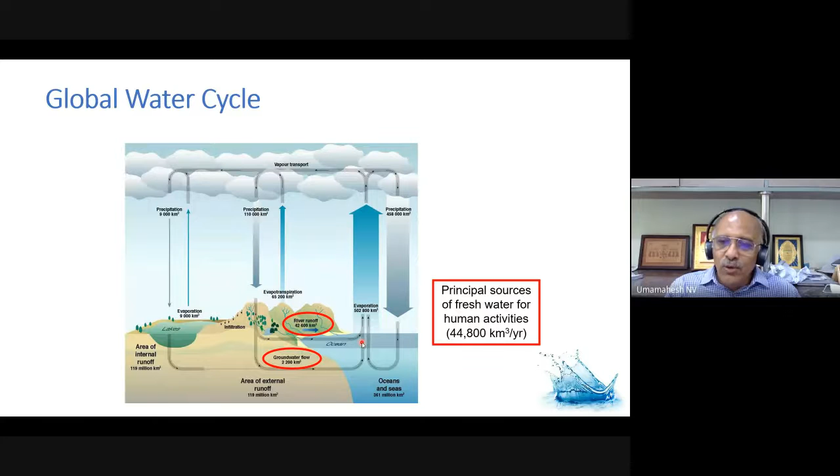And in this, what we are interested in is the river runoff, which is around 42,600 kilometer cube, and the groundwater flow, which is 2,200 kilometer cube. So these are the two freshwater sources that we can actually use for our human activity. We can consider these the principal sources, which amount to around 44,800 kilometer cube per year, a considerably very large amount. The only problem is that, as we'll see later, this water is not available uniformly in both space and time.

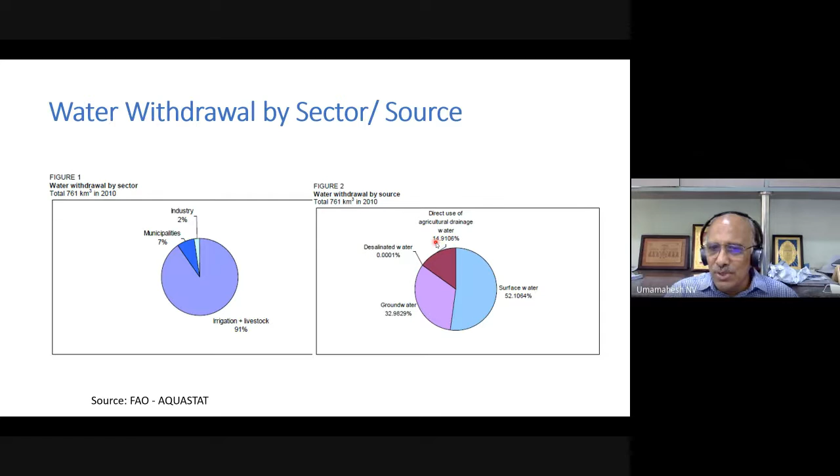Okay, so with this background, I just wanted to give a picture of the water resources available across the world, with specific reference to India. So we know that we are already reaching a situation where there's going to be more and more water stress. And certain places may reach a point like, as many of you would have heard, the situation that happened a few years back in Cape Town, South Africa, where there was an acute shortage of water. In fact, our Indian cricket team was there, staying in a 5-star hotel, and they also had to get water only in buckets. And if we continue developing water resources the way we do today, at least some of our cities may reach that kind of situation.

So with this, let's look at what is meant by sustainable development and what are the goals of sustainable development. This entire FDP, as I understand, is on sustainable development, and a lot of people would have talked about it. But here we are talking about water, and my focus will be on urban water as I proceed further. When you talk about sustainable development, water plays a very important role. It is the foundation of sustainable development because it is the most important component, whether we talk about energy, food, health, peace and security, or poverty eradication. So water is a very essential element that needs to be considered.

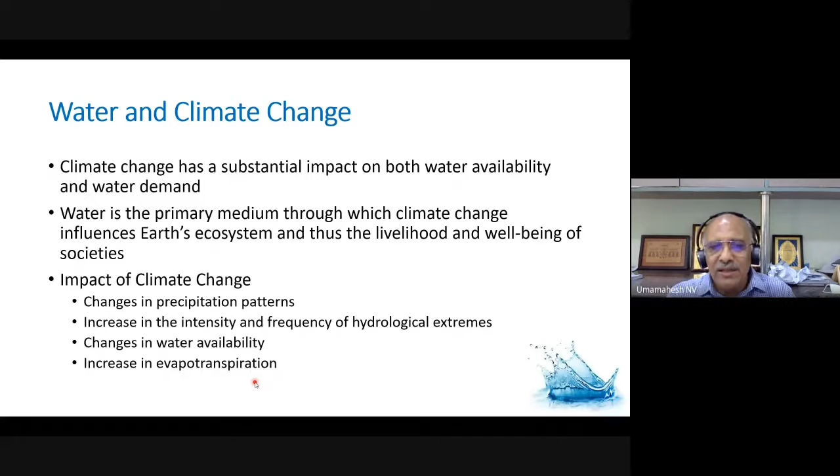So these four could be said as the major impacts of climate change on hydrology and water resources. We are already stressed because of the limitation of freshwater resources, and added to this, we have another challenge to face - the impact of climate change.

With this background, I've generally discussed water availability and the goals of sustainable development, and the impact of climate change. So let us move into the main theme of today's talk, that is urban water management.

Urbanization has become an important aspect. Across the world, there's a trend observed - the urban population is increasing. There's a lot of migration taking place from rural areas into urban areas, and the population living in urban areas has started increasing across the world, and more so in our country.

So what is the impact of this urbanization? Urbanization leads to a very accelerated rate of social change because an urban area starts developing so fast that there's a sudden social change in the way people live. Services that you provide become more and more complex - there's increased complexity in providing basic services to society in terms of water, transportation, or health facilities. Providing any basic needs in a city becomes very difficult, and there's increased cost of public services.

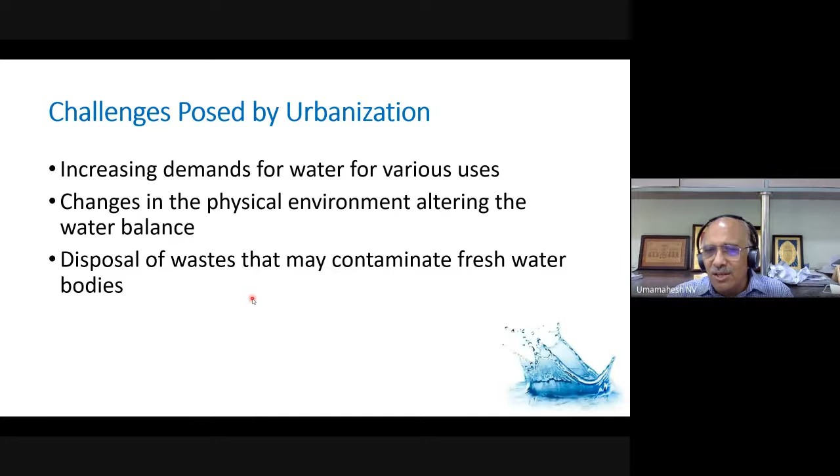So these are, in fact, issues that we are going to discuss as I proceed further.

If you look from the Indian point of view, Indian urban population is expected to reach about 600 million by 2031. This is a study conducted by the Ministry of Urban Development.

If you look at the per capita expenditure needed to provide urban water infrastructure facilities, this is as per 2009 to 2010 prices. In today's prices, this is definitely much higher. Around 13,329 rupees per capita for infrastructure, meaning per head, and rupees 840 per annum for operation and maintenance, again per capita.

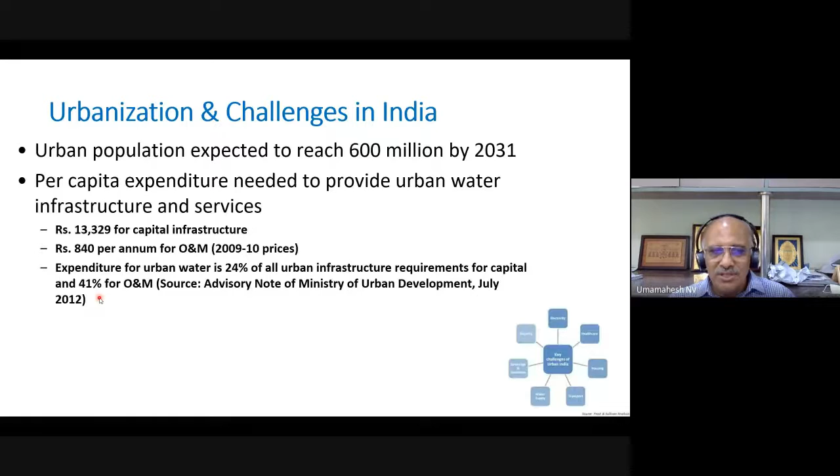Now, if you look at the total expenditure needed in urban areas for infrastructure requirements, the water sector accounts for 24% of total infrastructure requirement, and it is around 41% of the total operation and maintenance cost spent in urban areas for all infrastructure facilities. So you see how important a role water plays in a city or town.

In spite of so many developments and projects taken up in India, we find even today that the quality of water, the service in terms of water provided, wastewater disposal, or solid waste disposal - the quality of services delivered is poor in many cities across India.

I recall, maybe around 30 or 40 years back, we were depending more on municipal water. We never bothered to buy water unless we were traveling and didn't have safe water. We used to directly depend upon municipal water for our daily requirements. Today, very few of us directly use the municipal supply given to our houses. There's a lack of confidence in the quality of water provided by municipal corporations or municipalities, so people started depending more on the private sector for better water service, and that's what's happening across many cities.

And no city has 24/7 water supply. This is something the government of India is taking up, trying to take up, and in a few cities it's being experimented with, but still nowhere is it completely implemented with 24/7 water supply.

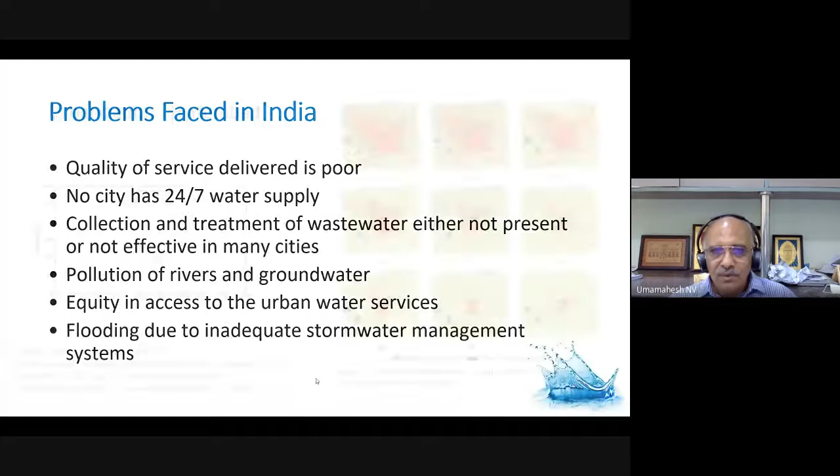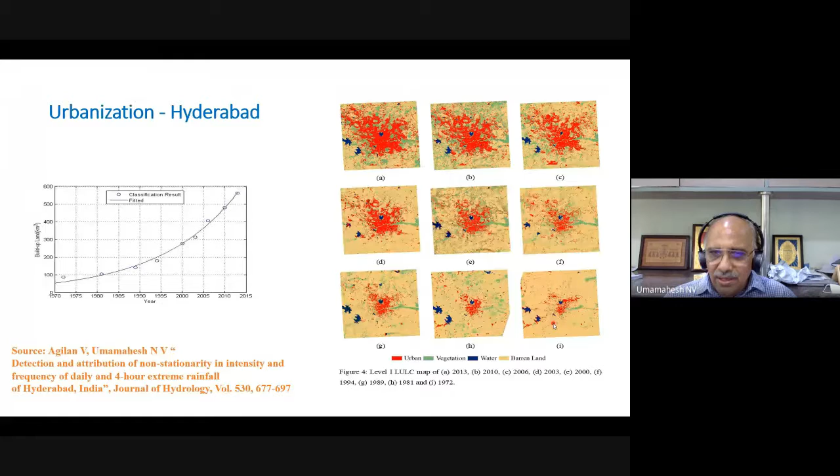So what's the impact of this growth? Now you have the population. Obviously, the built-up area has increased, meaning the population has increased. So you need to provide water for this population, and also other sectors. So if I look only from water supply and demand perspective,

But from 1990 onwards, you can see that the city is growing exponentially, so you have to start looking for other sources - groundwater, and then later the Singur Reservoir was constructed. Water was also taken from the Manjira project, and now there's a proposal, I think already started, to draw water from the Krishna River, and now another proposal to draw water from the Godavari. So because of the increase in population and the growth of the city, water demands obviously increase accordingly, and the available water at that location is not able to meet the requirements.

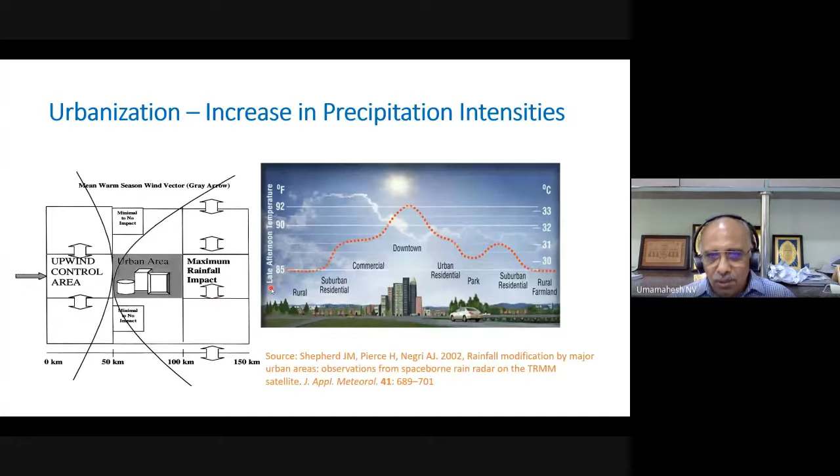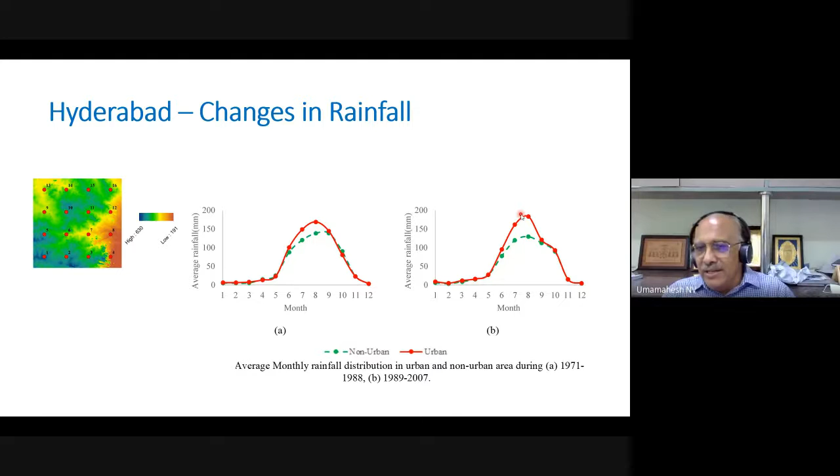Because I'm talking in terms of average rainfall, average rainfall increasing from something like 170 to around 200 millimeters in a given month, obviously it's quite a significant increase. So this is what has been happening here. So there's a change.

Another study that we tried to do here is to look at what we call extreme rainfall indices, which indicate the occurrence of extreme rainfall. For example, SDII, it's the ratio of annual precipitation to the number of wet days. If the annual precipitation increases relative to the number of wet days, obviously this will increase. That is an indication that there could be more rainfall occurring in fewer days. We find there's an increasing trend based on the data we have plotted between 1971 and 2013.

Number of days in a year when the rainfall is more than 20 millimeters, even there you find an increasing trend. And the annual rainfall from days where the daily rainfall was more than the 99th percentile has also been increasing. And the number of consecutive wet days, you find that's decreasing.

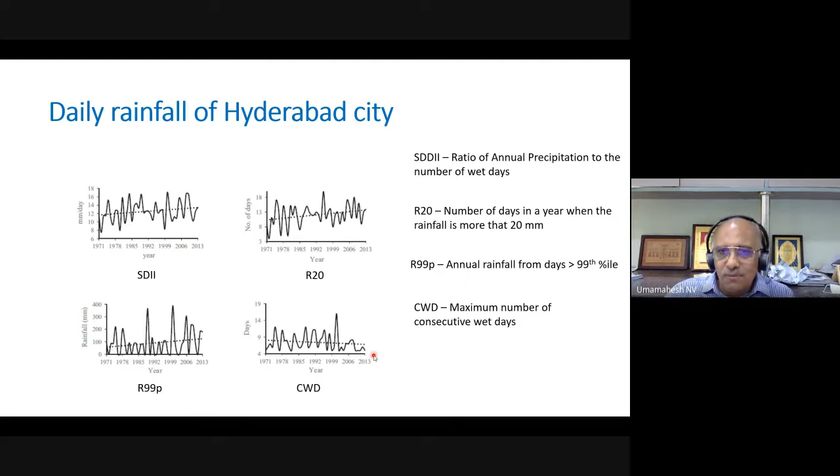So our study indicates that the total annual rainfall occurring in Hyderabad city has not changed significantly, but the number of wet days has decreased. That means the same amount of rainfall is occurring in fewer days, and thus there's more intensity of rainfall, extreme rainfall, and this is the result of what you've observed in Hyderabad today. This has become very frequent in the recent past.

Forget about cities like Chennai or Mumbai, which are coastal cities, because coastal cities are different. I'm talking about cities like Bangalore, Hyderabad, Delhi, which never heard about floods maybe 30 years back. Now they are experiencing this kind of situation almost every year. And one of the reasons is rapid urbanization and the increase in extreme, high intensity rainfall events.

So let us now look at how we tackle these issues. Rapid urbanization causes more flooding in cities because stormwater management becomes a bigger issue. At the same time, there is increasing demand for water, so you're trying to import water from other basins, and this can become unsustainable. So how do you tackle this situation? That will be my main focus when I talk about sustainable urban water management.

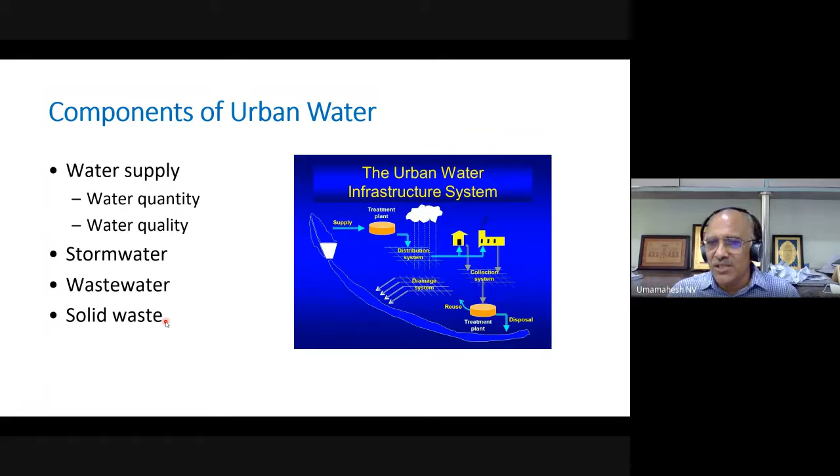though it's not water, the solid waste has an impact on the urban water systems, because dumping of solid waste in the urban areas can cause pollution to both the groundwater as well as the storm water that flows over the surface of the urban areas, which can actually interact with solid waste and thus cause pollution to the natural water bodies. So when I talk about urban water, I think we need to integrate or consider the solid waste disposal system also.

So what you are trying to do now is import water from distant areas. You are importing large amounts of water from other areas, other basins. So you have the natural precipitation, but because that's not sufficient, you are trying to draw a large amount of water. And a major part of this water that you are importing from other areas comes out as waste discharge, and you need to think of disposing of this.

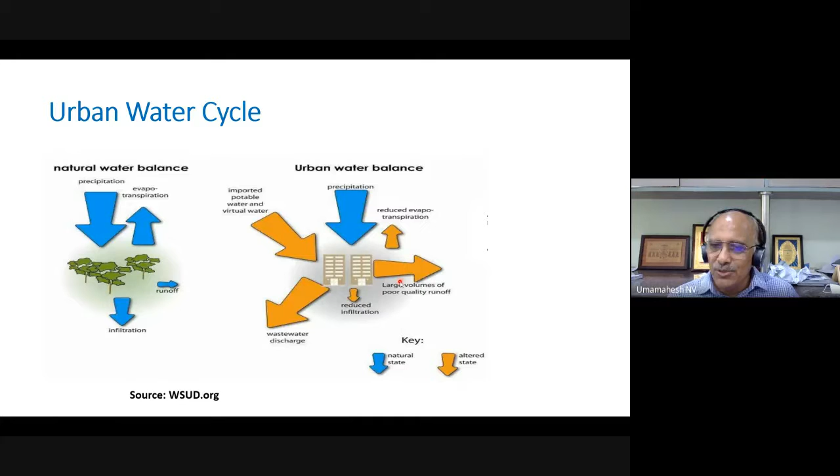Okay. So all these yellow arrows that I have indicated here are the altered state. So we are completely changing the water balance in the urban area and completely altering the entire hydrologic cycle in the urban area. So we are dealing with an increased wastewater discharge, a large amount of water has to be imported from other areas, and then you have a large amount of runoff also which has to be disposed. So we deal with these three major components.

So before I go into the concept of how we manage these three components, let's look at the interaction between the three water components. Most of the time we neglect this interaction. In an urban area, you're providing water supply, and the water supply could be provided from various sources. Certain sources would have a positive impact, like if you can recycle the wastewater, you can actually reduce the amount of water that you're importing from outside. So that can have a positive impact.

Most of the time, what is happening here is we're not harvesting this water, we're not making use of this water; we're always looking at how to dispose of this water. At the same time, because of the compaction of the entire surface, there's reduced aquifer recharge. At the same time, we are trying to draw a large amount of groundwater, and so the groundwater levels get depleted. So there's a kind of cycle of interaction between the different components.

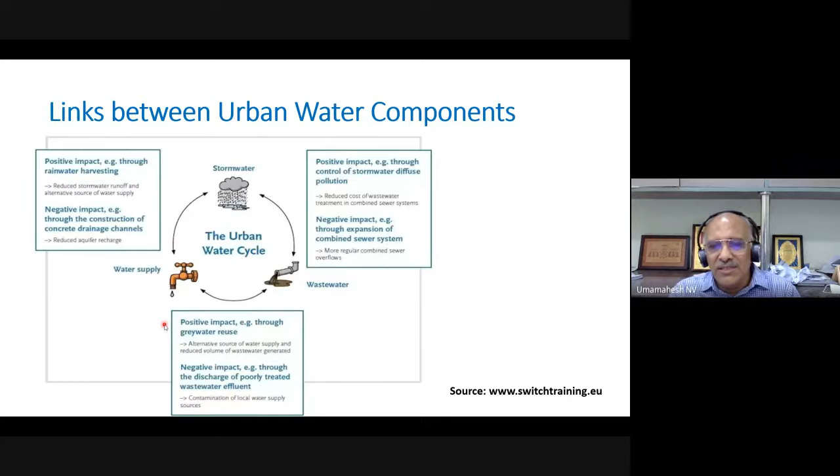So this is, I think, what we need to understand before we proceed further and see how to manage these three components of urban water. And this urban water is not isolated. It is linked with all other urban sectors like land use planning. In fact, any change in the land use pattern obviously will cause a change in the local hydrology. And the land use planning is affected by the water availability and also the flood risk at this location.

Housing, transport, parks and recreation, economic development, urban agriculture, energy, waste, health, all these sectors are linked with the water cycle. So by managing urban water and its three components, we can also reduce the negative impacts of urbanization on other sectors. For example, controlling the stormwater may reduce flooding of properties. By controlling the wastewater and the pollution caused by it, you'll be able to improve the health conditions.

Or maybe by controlling wastewater or the stormwater, you'll be able to manage the solid waste much more effectively. And in fact, some of this wastewater as well as the solid waste could be a source of energy in urban areas. And sometimes this wastewater and the stormwater could be used as a source for urban agriculture, where you can increase the productivity in what we call urban farms. And if you can manage and control water demand, in fact, water scarcity can restrict economic productivity.

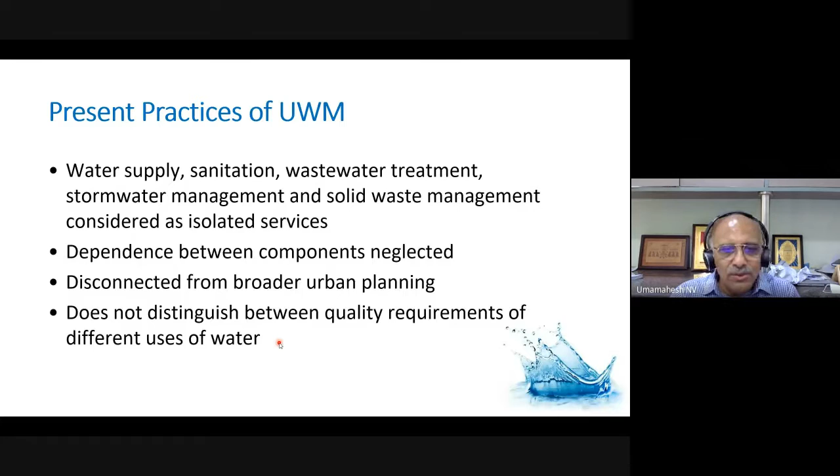So this is the way of supplying water. I think we are not able to distinguish between the different quality requirements for different uses. Okay, so obviously the way we are managing water in urban areas today is not sustainable, and that's where we are trying to look for a different way of managing this urban water.

Okay, so what we require is a kind of integrated approach for management of urban water. And this is something which is realized across the world. I'm not just talking about India. I think the same thing is applicable to different countries. And many of the developed countries have understood the implications of this present way of managing the urban water, and we are moving towards what we call sustainable urban water management.

There are different initiatives taken by different organizations across the world. For example, in the European Union, there is a research program called SWITCH, which talks about integrated urban water management. Many of the cities in the European Union are slowly moving towards this program and trying to implement integrated urban water management. In Australia, what I am calling today sustainable urban water management is called water sensitive urban design, and in the USA it's called low impact development.

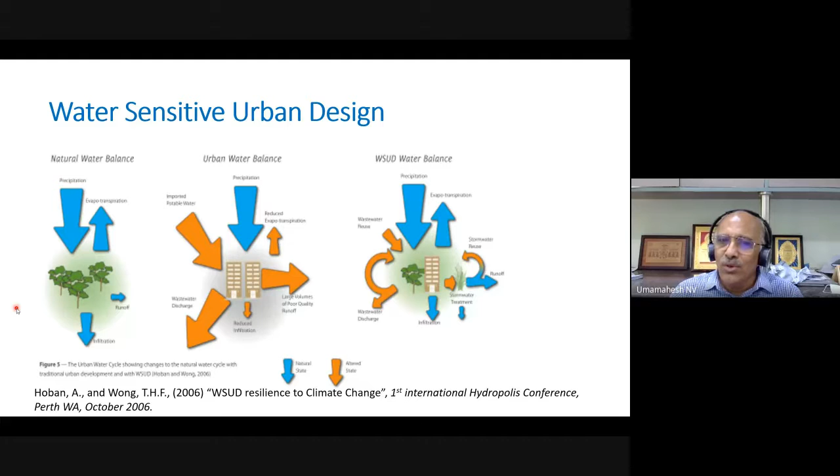So this concept of urban water management obviously considers all parts of the water cycle. In fact, in the earlier approach of urban water management, we considered water supply as different from wastewater disposal and stormwater disposal. So when you focus only on water supply, because you are not able to meet demand, you start importing water from other places. And then you are concerned about how to dispose of the wastewater generated from the urban areas, and then urbanization increases runoff, and then you are concerned about how to dispose of this water.

If you look at all these components in an integrated approach, we can classify water into different categories: blue water, green water, gray water, black water, and brown water. These are terms you may have heard about. So you have rainwater or blue water, and then green water, gray and black water or brown water. They are all wastewaters, but with different qualities.

Then there's reclaimed water and virtual water, which isn't directly water but comes in other forms. For example, when you import food grains, vegetables, fruits, and other things consumed in urban areas, all this can be considered as urban virtual water.

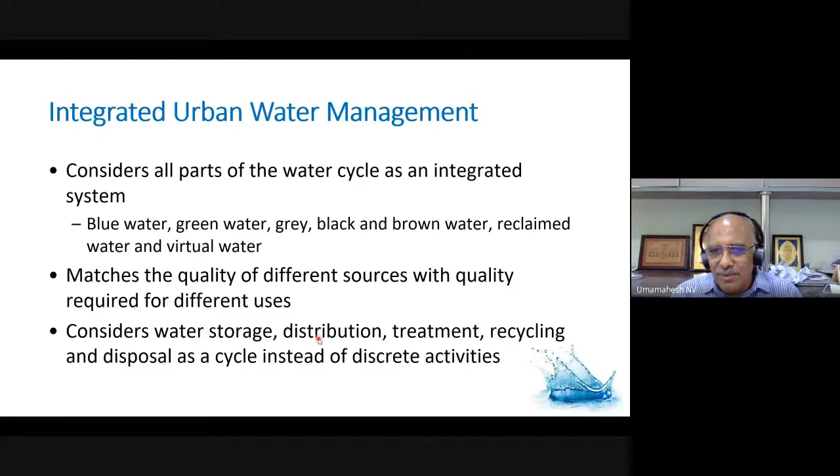If we understand that different uses require different quality of water, we can match those qualities to the different sources and types of water we have in the urban water cycle. So instead of always thinking in terms of disposing of wastewater, we need to start thinking in terms of storage, treatment, and recycling of the various wastewater generated from these areas.

That's what integrated urban water management consists of. We have these four integrated components, with overlap between urban drainage and flood management, sanitation, water supply, and solid waste — they are all connected to each other. So what we need is integration of land and water management, with the final aim of improving quality of life.

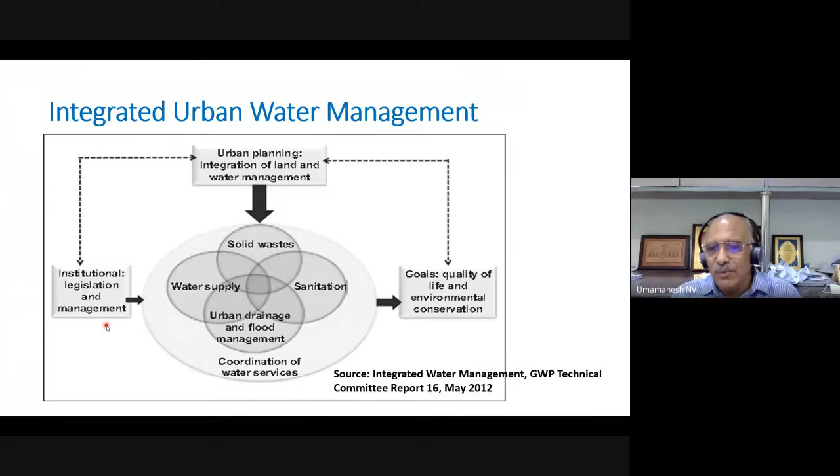What we require is strong political willpower or legislation to achieve this kind of integration across various urban sectors. And from our side as engineers, we need to look at what changes we need to make in the design of infrastructure facilities provided in urban areas, so that we'll be able to better manage these facilities. I'll start talking about each of these components of urban water and what changes we need to make to make these sectors more sustainable.

First, let's talk about demand. We need to optimize the supply and manage the demand. Everyone has to accept that we must provide equitable access, and for doing all this, we need an improved policy and intersectoral approach.

As far as stormwater is concerned, we can look at stormwater as a source rather than a nuisance. If we treat stormwater as a source, we can attenuate the peaks, make use of the stormwater, reduce flood peaks, and reduce urban flooding, while also providing another source of water for various activities. The same thing can be looked at with wastewater.

Wastewater can be separated at the source and used. Instead of looking at increasing supply from other areas, we need to look at how to reduce water demand. We need different kinds of innovative solutions so that the demand for water is reduced, and for this, there is a need for physical and institutional integration of management.

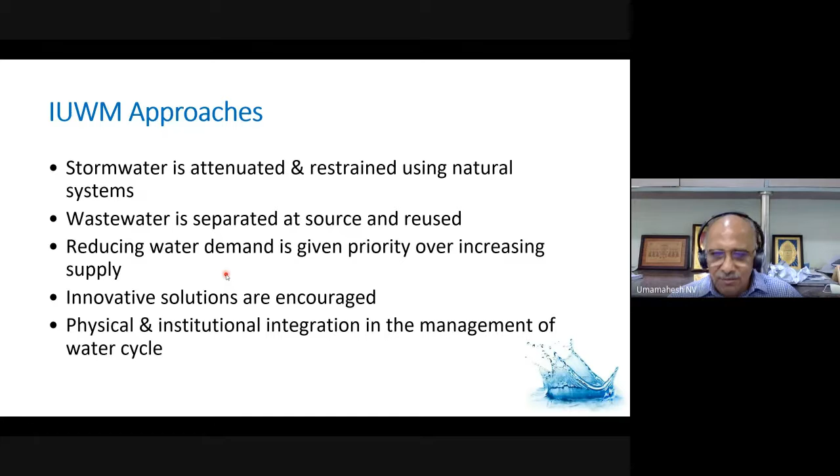So how do we make it more sustainable? We have to look at reassessment of demand forecast, try to look at alternate sources of water. Most urban areas' water supply systems have a lot of leakages, and if you can reduce the leakage and wastage of water, we can reduce or control the demand, and also try to reuse the water.

To meet the requirements of water, what we are trying to do today is import water from different locations, from other sources, maybe long distances. In Hyderabad, Singur and Manjira are close by, but now from Krishna water and Godavari water, you are drawing water from hundreds of kilometers to supply the city. So this is obviously becoming unsustainable.

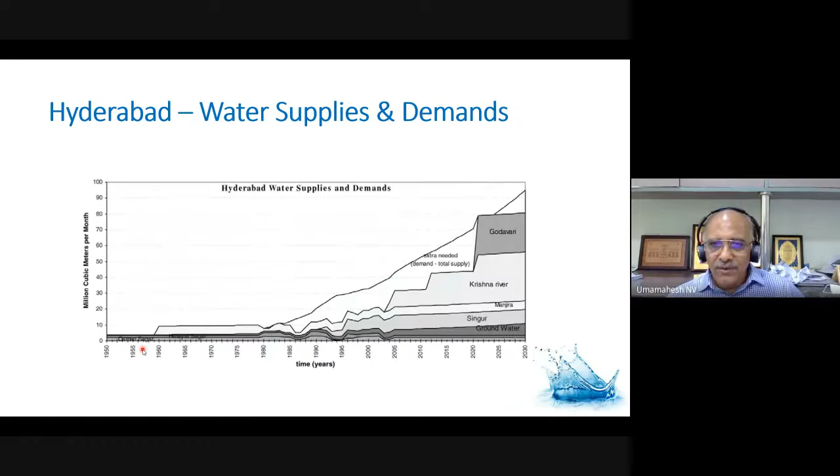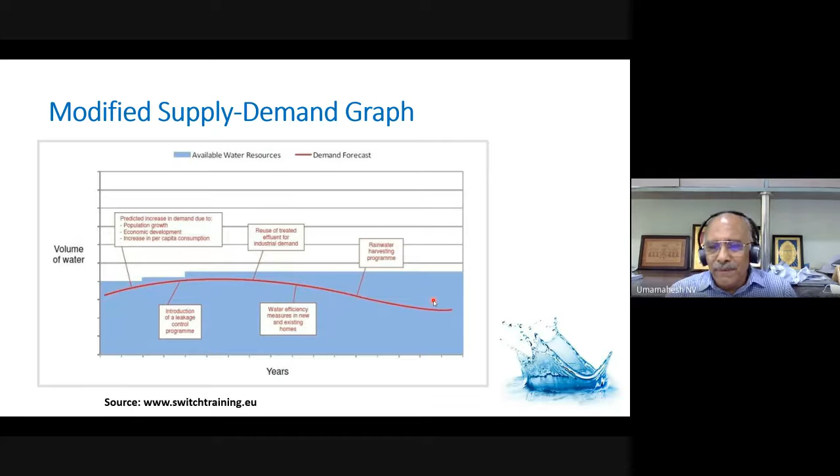You don't need to import water. Whatever water you have within the city should be able to sustain or meet the requirements. So these are the things we need to do as far as water demand is concerned. We have to look at water leakages and ensure supply efficiency increases by controlling leakages, and look at treatment or recycling of wastewater as well as rainwater. At the same time, we need new engineering designs which can make our water faucets and distribution systems within an apartment or house more efficient so that losses get reduced. So this is how we can try to control demand.

Now coming to stormwater. As of today, what's our approach? When rain occurs, as an individual house, I have an apartment or house, and I don't want to see this rainwater accumulating in my house. I would like to dispose of it as early as possible. So when I build a house, I'll try to see that whenever rain occurs, I'll push out the rainwater out of my house. That's what everyone is trying to do.

And that's what the city is also trying to do. In the process, we're always looking at this as a nuisance, and always looking to dispose of it as early as possible. And in the process, when you have more intense rainfall, the sudden increase in flow causes flooding. In fact, urban flooding, compared to river floods, is actually caused by very small rainfall, just 15 or 20 minutes of rainfall, and you see many urban areas get flooded. And because you're not allowing the water to remain at the location where it occurred, there's less opportunity for the rainwater to infiltrate and recharge the groundwater, so there's increased runoff. And because the velocities are higher, it's also causing erosion, sedimentation, and pollution of the river water.

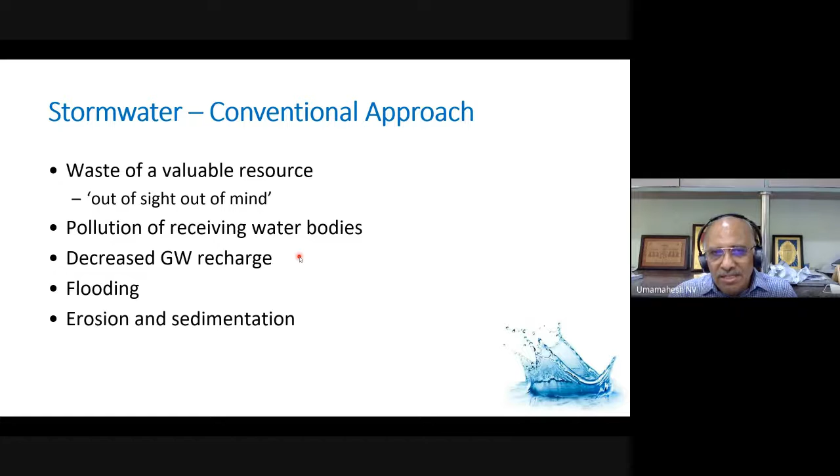So this approach that we are adopting for controlling stormwater in urban areas is completely unsustainable. Looking at stormwater as a nuisance is wrong. If you look at stormwater as a source, stormwater is not a nuisance, it is a resource. So how do we control this at the source itself?

In most major cities today, there's less of individual houses and more communities living together, maybe large gated apartment communities or gated communities with individual houses. So it's easier for them to plan their community in such a way that they control the water at the source, so that the stress on the main drains gets reduced. So we have to look at controlling the source. Let every individual house, every individual apartment make their own alternate measures to either infiltrate the stormwater coming into them, retain it, and then allow infiltration or storage.

Some efforts have been made in this regard, and in some cities like Hyderabad, even Warangal, or Vijayawada, the government said every house should have their own infiltration ditches or infiltration trenches, to collect rainwater so that infiltration takes place. But that's not the only solution, because infiltration trenches will not work in every location. So you need alternate ways in which stormwater is retained at the source itself, so that there's retention of the peak in the main stormwater drainage systems you have.

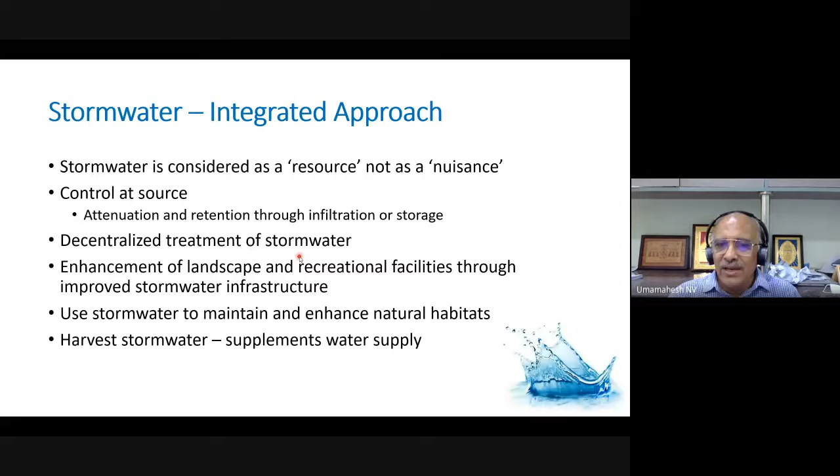In fact, if you look at literature, you find a lot of different ways in which you can actually control the stormwater. And most of the time, these facilities also improve the landscape; in fact, they bring beauty to the area. For example, some of you would have seen some of the new airports or some of the new premises being constructed at different locations.

I'll just give an example of the Hyderabad airport. I don't know how many of you have seen the Hyderabad airport. It's supposed to be a greenfield airport. In the premises of Hyderabad airport, you find many of these kinds of structures, and in fact it's a very beautiful landscape. And most of the stormwater actually gets collected there, and then it's disposed there itself.

So you'll have these kinds of drains instead of concrete drains, called swales, with grass cover. So it also enhances the landscape. At the same time, when the rainwater flows over this, there's more opportunity for it to infiltrate. That's what is called swales. And then you can have what you call bioswales, where you have some kind of plantations which can use the stormwater. So some kind of treatment also takes place here.

Because in urban areas land is very precious, and not everywhere land is available. So if land is available, we can go for some kind of detention ponds, which can collect the rainwater, stormwater, and then retain it. And this could become a kind of a recreation spot.

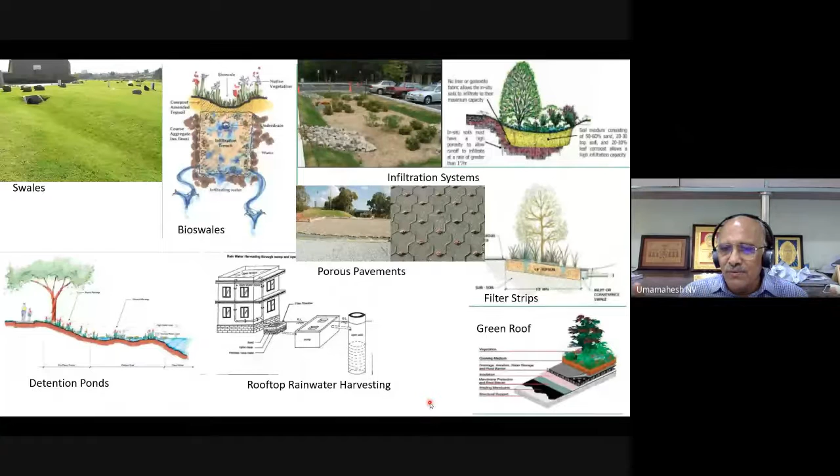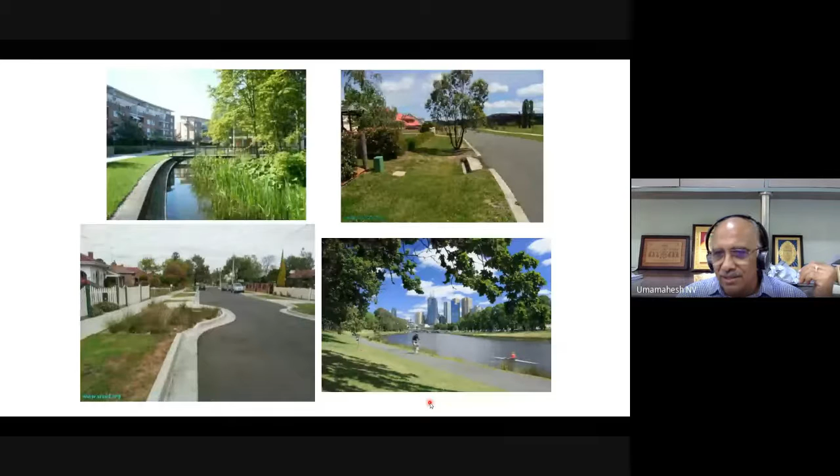And I think this is something which has been practiced earlier in India. If you look at the ancient literature of old cities in India, you may find such ingenious techniques through which people used to harvest water, clean water. So for example, this can be used for landscaping our communities by these various systems that you can use to control the stormwater.

Coming to wastewater, I think this is another important component. We have high water use, and even in terms of water use, you have different types of activities, and different activities produce different quality of wastewater. But unfortunately, in our conventional system we try to mix all these waters. The water coming out of your toilet, from bathrooms, kitchen, all these waters are mixed. Everything is considered as wastewater.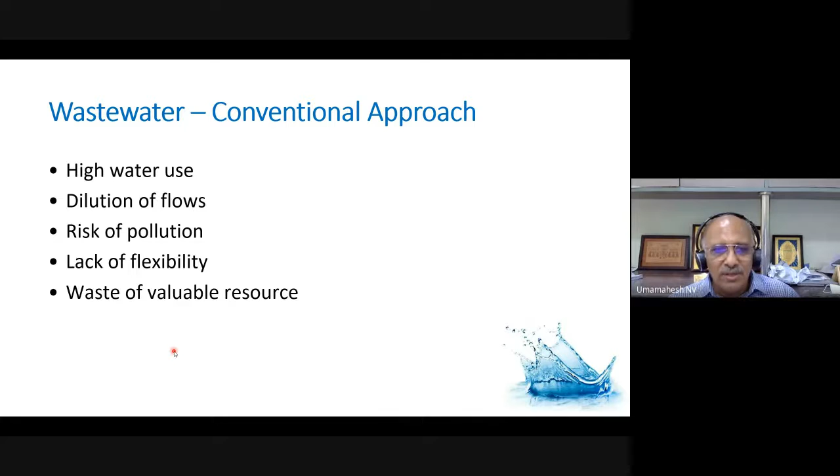So certain types of water are of very, very bad quality, and certain ones are easier to treat. Because we are mixing all these things, the amount of wastewater generated is quite large, and treating that large quantity of water is obviously going to be more expensive. And in spite of this treatment, there's more risk of pollution and not much flexibility in the control of wastewater. And maybe we never looked at the waste as a resource.

Within a household, there are small changes we can make in design so that we'll be able to control the amount of wastewater. For example, if you look at the different uses of water within a house, there's wastewater generated from toilets through flushing, then the grey water coming from kitchens and from bathroom or shower areas, and then the stormwater. The volume of stormwater depends upon the rainfall that you have.

The grey water generated from a typical house is around 35,000 to 45,000 liters per person per year. And what does it contain? It contains certain chemicals like detergents, and food waste. But in terms of pathogens, it contains very few pathogens and few nutrients. So treating this grey water is relatively easier than treating the water coming out from the flushes.

This water is usually in the range of 3,000 to 15,000 liters per person per year. So we are mixing this with this much quantity. The larger quantity is less polluted compared to the smaller quantity. So you can segregate this wastewater from the other wastewater. This contains fecal matter and urine, and these two have a lot of nutrients, so this can maybe be used for generating fertilizers or other things. But you need some kind of treatment for this.

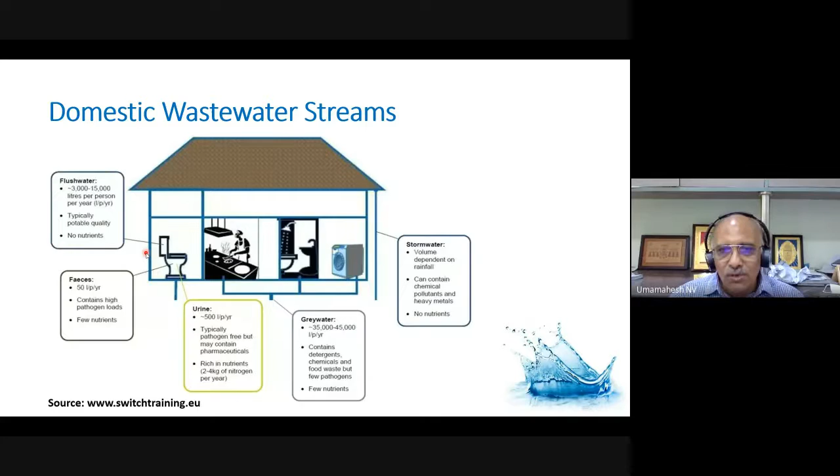So these are simple things which we can easily do, provided we have the willpower to do this. Through this, I think we can achieve the control of wastewater, and that is how we can even reduce the amount of water demand that we have. So what we require is a separate collection system for various waters like black water, grey water, and storm water, a decentralized treatment, reuse of treated effluents, and recycling of nutrients, especially the nutrients from the flush water or the water coming from toilets. Okay.

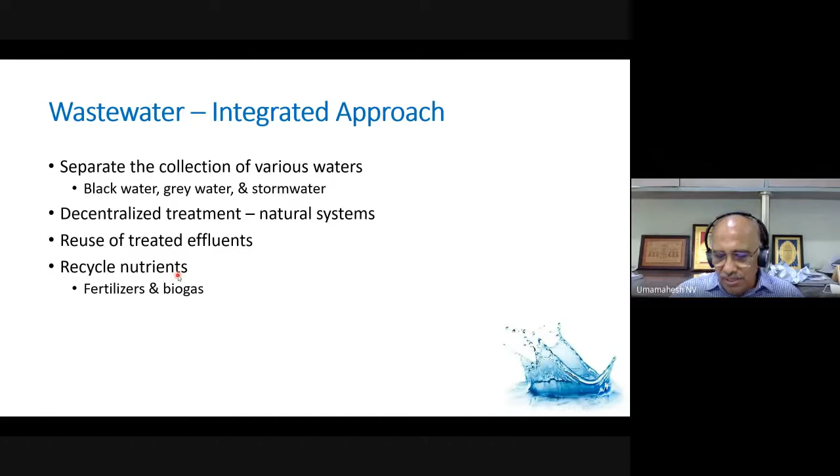So this is how we have been doing. We use food, energy, water, and then we have pollution. Then we have diluted wastewater. We're treating it, and the treated effluent is being disposed into natural water bodies, and the sludge and byproducts are being disposed as part of solid waste.

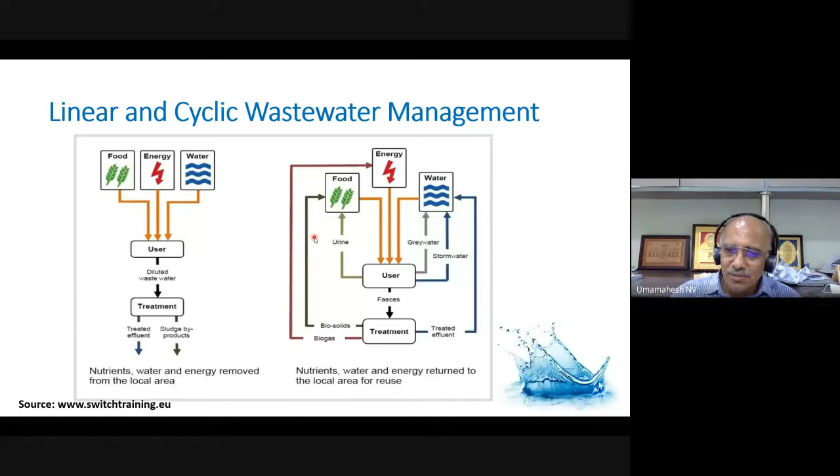But if we can do some kind of recycling, you try to have a separate system for this. You can collect the stormwater and rainwater, recycle it and start using it for different activities, and then maybe you can treat this effluent water and use it for producing some kind of energy. At least to some extent, this energy can be used within the house itself, and the biosolids produced from the treatment of this black water can be used as a fertilizer for agricultural activities. Not necessarily within the city, but they can be transported and used in agriculture. This is how we can try to make it more sustainable.

Okay, all this is fine, because these are not new things that I am talking about today. Whatever I have discussed today, most of you would have heard about from some source or other, because we've been talking about these things for at least the last 10, 15 years. But why are we not able to change? Whenever we try to change, there's always a barrier. The barriers could be social barriers.

There's public acceptance. I just gave an example of what happened in our campus. We tried to recycle the water and start using that water for flushing. Once some of the students came to know that treated water is coming to the flush, there was some apprehension. They started complaining that they don't want this water, or they had a feeling that this water is polluted and causes health problems. They started complaining that the water is smelling and such things. So this is okay. Because we are trying it for the first time, there could be some issues.

But what we need to do is overcome these issues and try to make it more acceptable, but it should not act as a barrier for moving forward. Because we have a kind of psychological barrier when you talk in terms of recycling. And then obviously there's an institutional barrier, because I think you need a strong political motivation, which is unfortunately not that much in India. So we need a lot of strong political motivation and good governance to actually cross these institutional barriers. And then technology barriers, obviously, because present technology doesn't meet this.